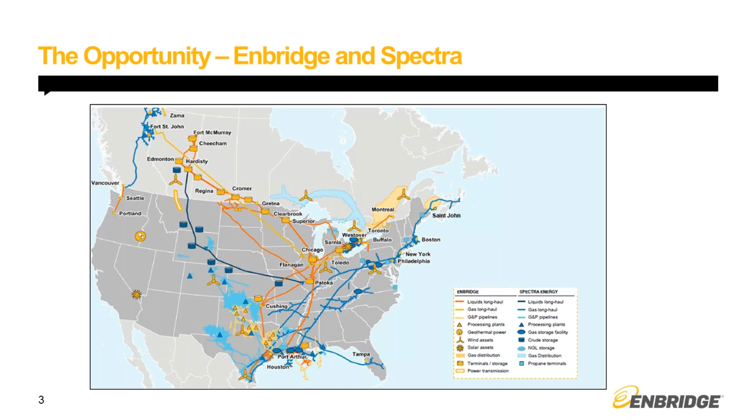So I'm going to talk now about our affordable housing program. We basically have 3 programs for affordable housing providers: residential, multi-residential, and new construction. The first 2, residential and multi-residential, are retrofit programs, so these are for existing buildings, and obviously the new construction is for new buildings. So first I'll cover residential.

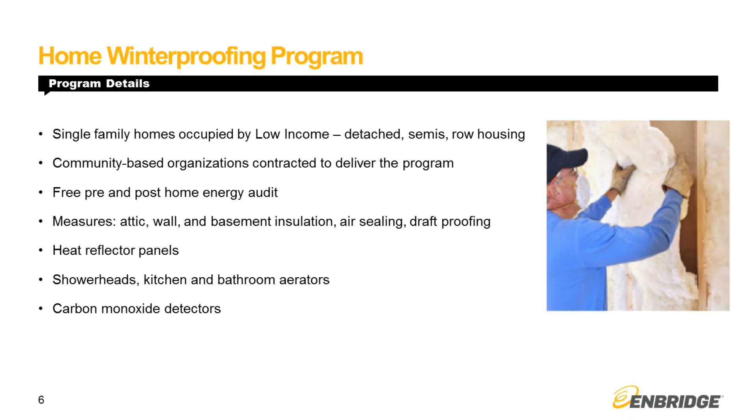Included in the program is a building assessment, which typically would be done by me. I'm not an energy auditor, but I could do a simple gas equipment assessment. We'd also provide an energy audit subsidy if you were to hire a consultant or an engineer to come out and do an ASHRAE level 2 or ASHRAE level 3 audit. We could provide incentive towards that. And then the bulk of the program is financial incentives to help offset the cost of high efficiency retrofits.

So the bulk of what we do is boilers. Like I mentioned at the start, I spend a lot of time in boiler rooms. Typically most of the projects we see are boiler retrofits because that's the bulk of the heating in affordable housing multi-res buildings. But any type of gas savings retrofit could be eligible. And the great thing about our programs is we'll actually develop a custom savings calculation and incentive quote for you prior to you moving ahead with your project. So it's a great way to assess what your simple payback will be and compare it against a different option, maybe a lower efficiency option.

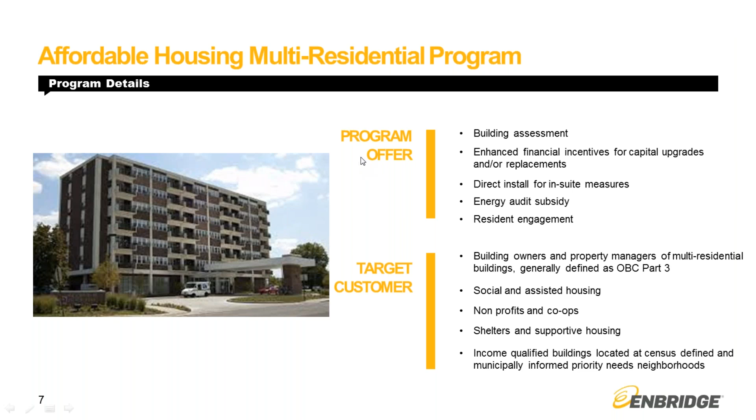And then we can also install heat reflector panels, like I had mentioned on the earlier slide. So heat reflector panels, if your building is heated with hydronic convectors, or water-heated convectors, that's what I mean when I say hydronic, or radiators, so those are your classic steel radiators.

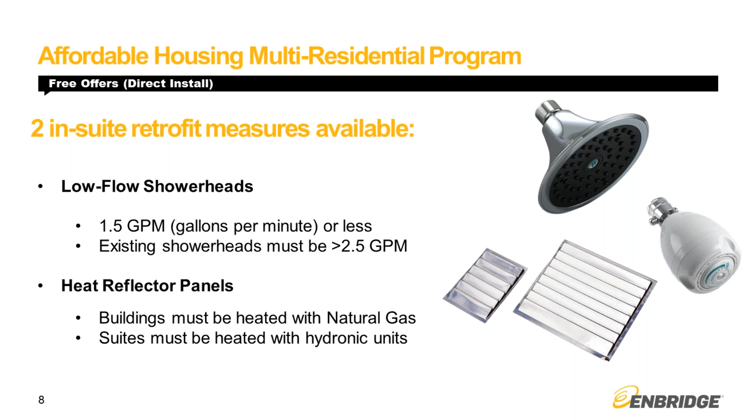These panels can actually fit in behind the radiators and the convectors, and they prevent heat loss through the exterior wall. And by doing that, you can reduce the boiler supply temperature at your boiler and reduce your heating load. So we usually see about 10% savings on the space heating load of a building. And those can be installed at no cost to the housing provider as well. So that sort of covers our retrofit program, so the residential and the multi-residential retrofit.

And then our new construction program was launched last year. Ryan will talk a little bit more about this program, but I'll just give you a quick high-level overview. So basically, the Affordable Housing New Construction Program is designed to help provide incentive to housing projects that are going to be offering affordable housing units to customers, and we can help offset the cost to implement some of these high efficiency measures.

So we do that through 3 phases: a technical assistance incentive and design incentive up front, where we'd actually run a design charrette for you, and also cover some of the costs you would incur to bring some of your engineers and consultants to the table.

We'd also provide an implementation incentive, so once the work's completed, depending on which equipment you've chosen and which efficiency level you're going to be achieving in your building, we can provide up to $1,000 per unit incentive based on your ability to exceed Ontario Building Code. Single-family homes are eligible, and multi-residential projects are eligible as well. The incentive structure is a little bit different, but generally it's the same thing, divided up into 3 stages of incentives.

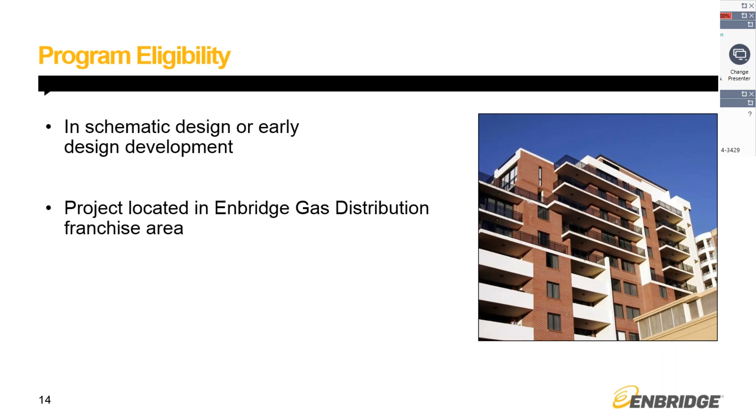In addition to those requirements, the project must also be 3 or more stories and greater than 600 square meters. All of the case studies that we will talk through here shortly were all new construction projects. In addition to that, the projects must also meet the eligibility criteria for public funding assistance for the purpose of creating new affordable housing. In addition to those items, the whole essence of the project revolves around getting in early in the project design. So in order to be eligible, the project must also have been in the schematic design or early design development, as many of the strategies and items that are discussed through the program contribute to decision making. We want to get involved early before those major decisions are made, as a lot of times those early design decisions really impact the overall energy usage and energy savings potential of a project. And finally, the projects must be located in an Enbridge Gas Distribution franchise area.

So the program did provide a number of services. As Cam mentioned, all of these services were complimentary, so at no cost to a building owner or a design team. The first of which was a customized energy model that simulated how the building would use and consume energy. From there, that model was used to identify and evaluate what strategies had the greatest energy savings potential. From there, we use those strategies to also evaluate energy cost savings as well as paybacks. For all of these strategies, since they are improvements or incremental benefit to a project, there are also associated incremental costs to implement them into the project. And to address that, we developed simple payback criteria to help teams identify what strategies might have the best potential and quickest paybacks.

In addition to that, financial incentives were also available to help offset the cost for implementing those energy conservation measures. As Cam noted, there was that implementation incentive to help address and alleviate those initial or additional upfront costs to the design team for plugging those measures into a project. In addition to that, there were also meetings and information transfer that the design team and owner had to provide and sit in on. And so, as Cam noted, there was that technical assistance incentive that is available to the teams to help account for that additional time and commitment to providing that information for the program.

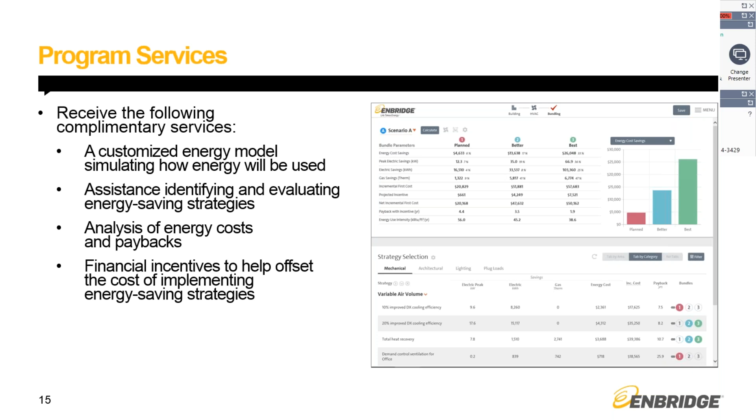I want to take just one step back here and talk a little bit about whole building energy analysis. I won't go into too much detail here, but really this is kind of the building blocks of the program. Whole building energy analysis allows building owners and team members to identify what goals are important to them in helping make decisions. For different teams, their goals could be very different.

One team could be completely interested in energy cost savings. Another team might be concerned with energy usage, and yet another team might be all in determining what they can do to get the maximum incentive through a utility program. So whole building energy analysis at least allows us a starting point for identifying what those goals are.

And then in addition to that, it allows us to determine what energy conservation measures or strategies allow the greatest impact or are critical to meeting those energy goals and staying within a project's budget. Those two things combined allow for reduced time for teams exploring suboptimal strategies or those strategies or options that really don't meet the design criteria or energy goals, or those strategies that really don't get a lot of bang for the buck.

The whole building energy analysis coincides with the energy design assistance process. So this is the process that we followed through the Affordable Housing New Construction Program. The first step was to gather information. That was done via an application for the program where the team completed very basic information on the project. In addition to providing those project details, the team also provided early design drawings and narratives via the mechanical system, lighting system, anything that was available early on in the project.

From there, we took that information and conducted a preliminary analysis where we built up a model, identified various energy conservation measures, and organized them into various bundles, which we'll talk about here in a little bit, and sat down with the team to identify which of those options was best. We then conducted a final analysis where, based on the information and feedback we received in the meeting, we fine-tuned the energy model to provide a truer or more aligned estimate of energy savings potential, and then an estimated incentive based on the design that the team was looking at.

From there, the fourth step in the process was validation or verification. This process was completed after the project was complete and allowed us the opportunity to review final design documents, construction submittals, cut sheets, to verify that the various strategies the team said they were going to implement into a project were in fact present. From there, we created a final model and trued up the savings calculation to provide a final savings value to the team and Enbridge. From there, the various incentives were paid out for each of the projects.

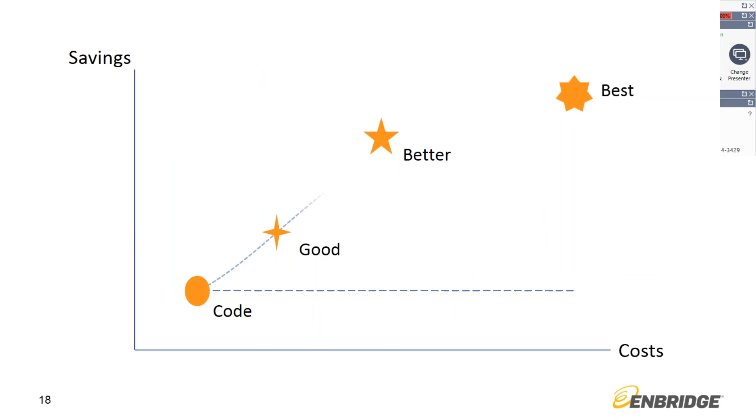I believe that this chart on the screen here really captures the essence of whole building analysis and the design assistance process. On the horizontal axis, you can see costs. Those would be costs associated with implementing more efficient strategies into a project. On the vertical axis, you see savings. Those are going to be energy savings, cost savings.

And through the curve here, you can see that as you move from a baseline or a code-compliant building, there are additional savings. And the steeper the slope, the more increasing value there is for those strategies. However, once you get to a certain range, those savings start to diminish and do not become quite as cost-effective. So through the process, the goal is to determine which of those strategies really provide the biggest savings potential and meet the design team and owner's goals for the project.

To accomplish that task, the program used NEO, or Net Energy Optimizer, which is an online modeling tool and interactive bundling tool that we have developed here at the Weidt Group. This tool allows us to take the very early information that the project team is able to provide us and create a very detailed energy model to capture the savings potential of various strategies.

It also gives us the opportunity to interact with a team and show them real-time what various combinations of strategies will do for them in terms of energy savings potential and impacts in incentives. So as opposed to a team having to choose a strategy, implement it into a project, have that project sit and realize what those savings are, we are able to quickly identify what those estimated savings are in a virtual model real time while sitting down with the owner and the design team.

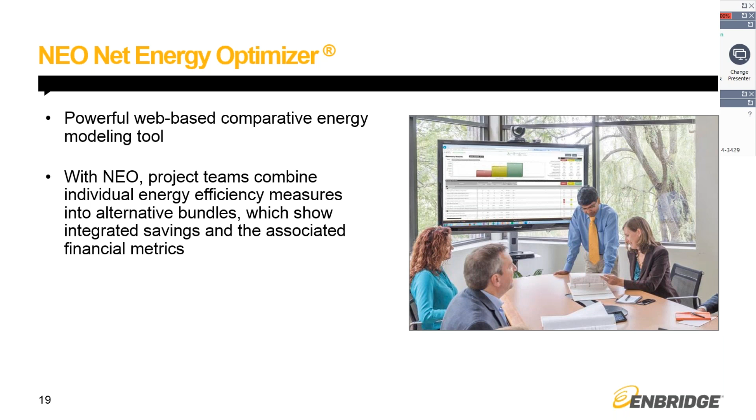So now I'd like to dive into our first real-world example. The very first project that we did was located in southern Ontario in the Niagara region. This project was approximately 12,900 square feet, or about 1,200 square meters. It was a 3-story building.

It was a senior living building, so there were 14 senior living apartments or units throughout the 3 stories, as well as some common area. That common area was the simple corridors or the lobby and communal space on the first floor, in addition to an office. So a very typical senior living building. The original mechanical design was to look at a gas-fired heating unit system for the apartments.

For this project, the design team and owner were concerned about the project budget. And so that was the main goal that we had identified early on in discussions with the team, and we worked to try and address that through our consulting and the program services.

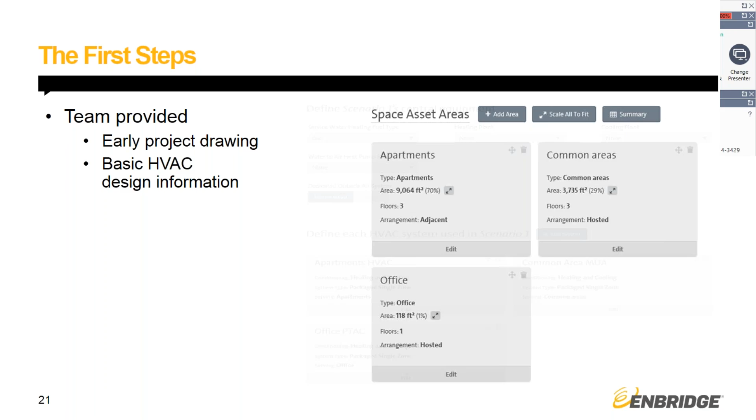To start out, we gathered their application, their drawings, and their narrative, and we took that information and plugged it into the NEO tool. We built up the model based on the space types that were in the building and identified the critical items to develop our model. From there, we took the mechanical system and built in the same information, but this time on the mechanical side. For the NEO tool, the critical inputs are building up the geometry and the mechanical system.

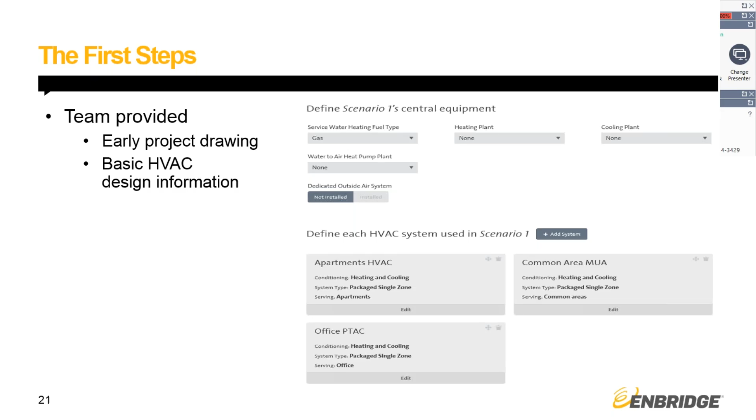Major items that aren't known at the time in early design are assumed values. Those values are based on industry standards and typical values that one might see in these affordable housing new construction programs. So to make this tool work and function, we don't need to have every single input early on, because early on in the design process, those items are not known. But from there, we are able to determine a starting point for savings.

In addition to showing some savings potential, we were also providing information to the team of where their building was likely going to be using energy on both an EUI, or a kBtu per square foot, or a cost side at dollars per square foot. From this information, we were able to say that for this building, the heating load throughout the building was the highest energy user of the various end uses that we had modeled.

But when it came to the cost side, that heating component did go down. And that was just due to the difference in cost per BTU of heating energy versus electric energy, and the difference in gas and electric costs. But again, this is what we use to help influence the team in assessing where they could potentially save money and energy through energy conservation, energy saving strategies.

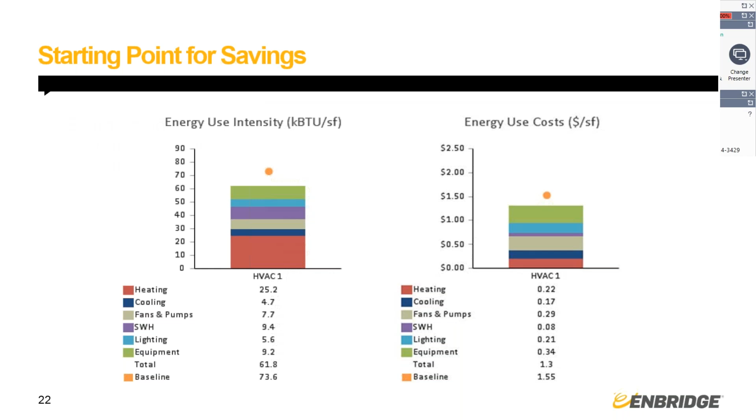From there, we addressed various strategies. So we had a list of hundreds of strategies that we were able to fine-tune and select that were appropriate for this building. Our strategies cover everything from architectural items, wall, roof assemblies, to windows and glazing, mechanical items for the heating and cooling equipment, and lighting, as well as various plug load and service water heating needs. We fine-tune that list to the specific project because every project might be a little bit different, and we have the ability to analyze the strategies for their specific project.

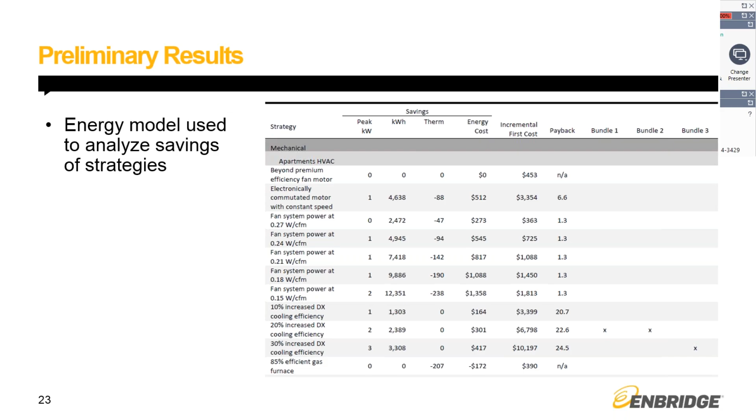From there, we take their project's information and assemble some preliminary bundles. A bundle is essentially a virtual building, or a combination of strategies in a virtual sense. So we can outline for them the energy cost savings of their project at the end of the day compared to that code compliant building. This is, again, a starting point.

As we conducted this exercise prior to meeting with the team, we had assembled the bundles in a good, better, best configuration. So again, if you were to remember that curve that we looked at, as you start to get higher, those potential paybacks do go up, because as you get more savings potential and more strategies, likely those items are going to cost more and you won't get as much of a return out of them. So we brought this information and presented it to the team.

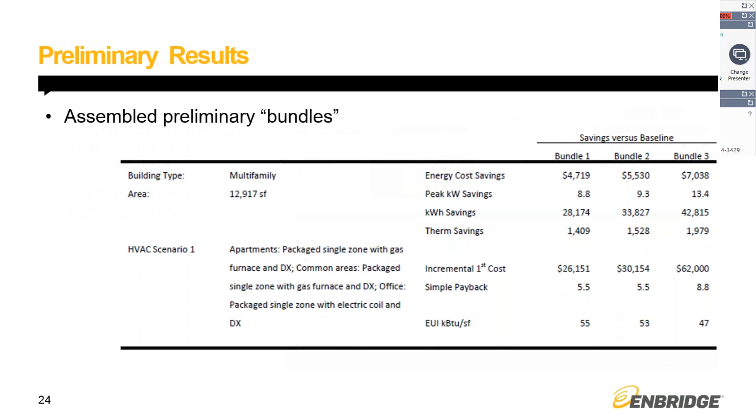From there, we were able to have our interactive exercise with the team. We brought forward the mechanical, architectural, lighting, and plug load measures and discussed those three bundles that we had identified. From there, we were able to look to the owner and the team for input.

One of the key important factors through this interactive exercise is getting that input from the owner and the design team, as that input allows us and them to realize which of these strategies help meet the goals of their project. And it also allows them to take ownership of the model, the process, and the tool.

It's one thing to just present energy saving strategies, but in these meetings and charrettes, as Cam had noted, we can identify and in real time determine which of these might have great impacts or little impacts. That can all be done based on the input and all the thought leaders in the room at one time, which is very helpful to the process. And this is what allows us to eliminate those scenarios that might not have great savings potential or meet their goals.

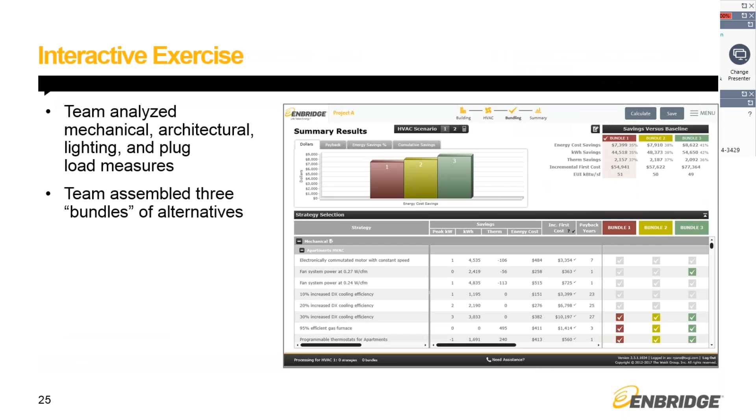As we move forward, our discussions turn to architectural measures. And again, based on those decisions that had been made early on, when it came to the wall system, there really wasn't much opportunity for savings here. But we were able to capture the level of efficiency that they were going with.

When it came to the roof assembly, this team did have some potential. So as you can see from the three bundles here, in bundle 3, we were able to shift that R-value out to show them if you did go with an R-value of R60 compared to the R50, this would be your additional savings potential. And from there, we were able to capture what the impacts would be in incentive as well.

On the architectural side, we were also able to address the glazing strategies that that team was looking for. They were able to provide us with the several different options they were looking at so that we could update and customize Bundle 3 to show them the impacts there as well.

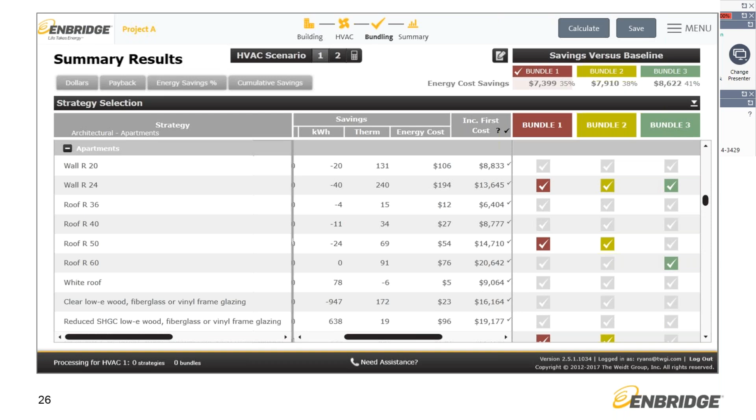We also addressed lighting through this project, and this is one of those items that in a design process, the lighting is likely not known definitively at the time of these discussions. As I noted earlier, we want to try and get involved in a project early in schematic design or design development. And at that time, lighting layouts, fixture selections, they're really not known. So what we try and do through this process is to just capture the installed energy or input wattage of a project.

And as you can see here, we organize our strategies in a stair-step pattern, as through discussions with the team, they had not yet made those selections. So we wanted to try and show them how if they went with the more efficient scenarios or installed fewer lights to still meet their design requirements or foot candle levels, they could potentially save energy. And what we're showing on the screen here is the apartment lighting. And so we had built that up to show them their various options there.

In addition to the apartment, we also presented to them how the various measures in the common areas as well as their little office would factor into those calculations as well. In addition to lighting design, lighting controls were also addressed. This was a smaller project, so the lighting controls and daylighting controls had smaller impacts, but as we learned in some of our later projects, there was more savings potential tied to those various measures once the projects became larger and some of these supporting spaces outside of the apartments increased in size.

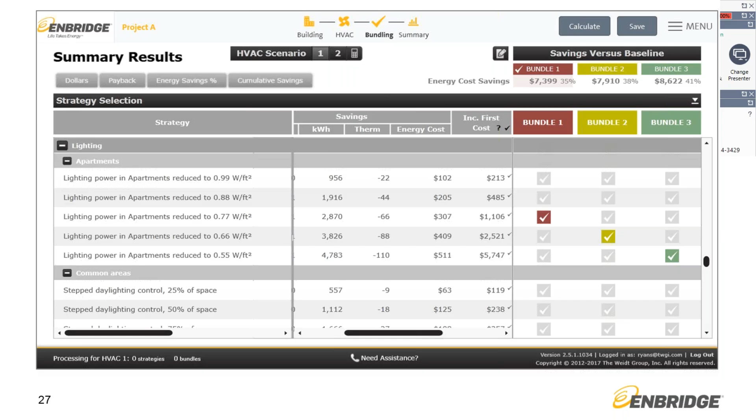From there, the final section that we had addressed with the team was various plug load strategies and service water heating strategies. For plug load items, we really looked at did a project have refrigerators, clothes washers, or some projects might have dishwashers. By going with more efficient equipment there are significant savings tied to those items.

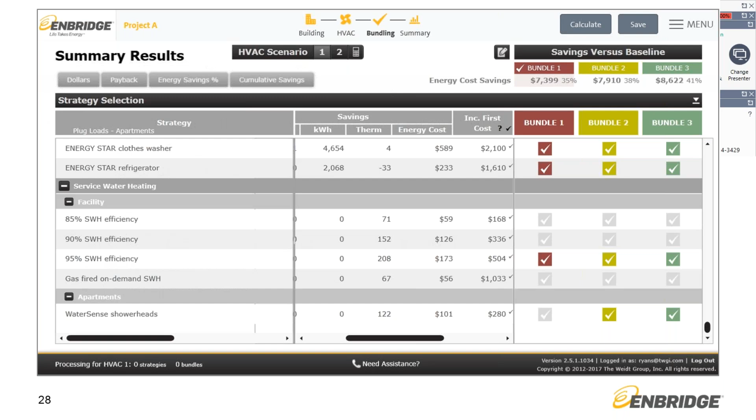In addition to that, there are service water heating strategies that could be applied. And as you can see from this chart, the team here was pretty committed to going with high efficiency condensing service water heaters. So we had applied those across the board. When it came to low flow or WaterSense shower heads, the team was uncertain if they would implement those. So those were located in our bundles 2 and 3 just to see what the overall impact was for those strategies. At the end of the day, this is kind of what accounts for that preliminary analysis that we talked through in our design assistance process steps.

After this meeting, the design team noted that there may be a potential design change for their project. As we noted earlier, their initial design was gas-fired heating units for the apartments. But we also noted that the project budget was also of importance. And as the team began to evaluate costs that came in for the project, they determined they may need to switch mechanical systems to go to a lower upfront cost system. That system was our scenario 2, or our electric heating units.

So this was a perfect scenario or a perfect case study to come up for the program, as with Neil and with the program, we were easily able to identify this and model this for the team and show them what impacts their original design or their gas-fired heating system would have compared to that of the lower upfront cost electric system.

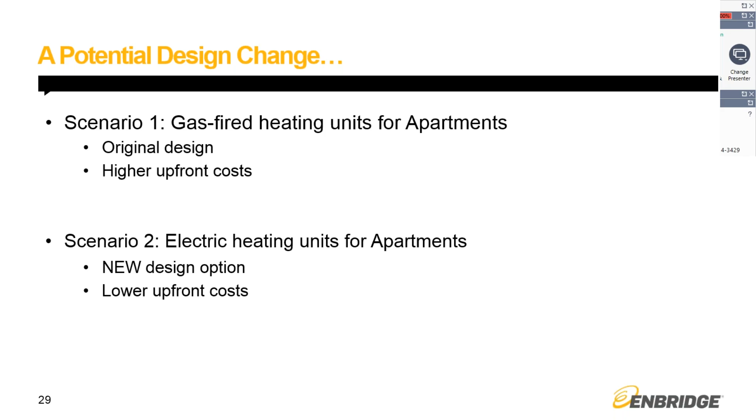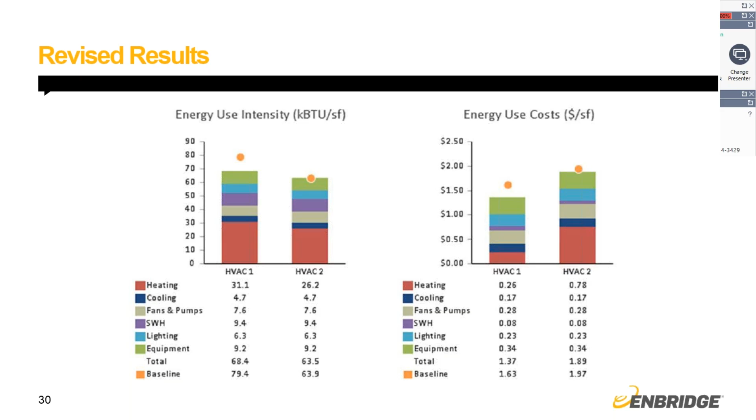From there, again, we had 3 bundles in each scenario. Other than the mechanical system change from the gas-fired unit in the apartment to the electric heating option for the apartment, all the other strategy selections were in fact the same. All of the architectural items, lighting measures, plug loads, service water heating were consistent between the 2 scenarios and the respective bundles. In the chart here, the respective bundles that had the same architectural, plug load, lighting, and service water heating strategies would be referenced by Bundle 1 and Bundle 4 in the red and the blue.

Referencing those 2 bundles, you can see that the gas heating scenario had an increase in savings potential in terms of energy costs. That was because the electric option, or Bundle 4 in blue, was the highest energy cost of all the bundles modeled, and Bundle 1 had a relative savings of over $5,000 compared to its electric counterpart. That same trend was seen throughout the other bundles as well, so referencing Bundle 2 and 5 and 3 and 6. So based on this, we were able to determine that the gas heating option had an increased savings potential on an annual basis for energy costs.

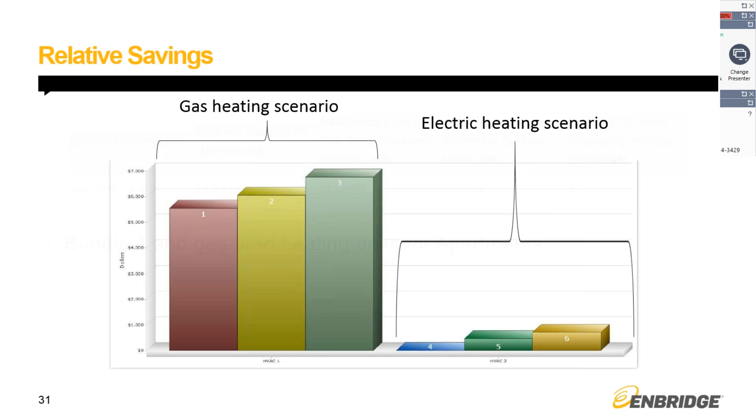When we paired that with an additional breakdown and analysis of the additional costs to go with that gas-fired unit, the team was able to determine that that additional cost for this project was just under $12,000. But in addition to that, the increase in savings potential going with the gas-fired option led to an additional incentive of $2,100. When doing a simple payback analysis of that additional cost, the incentive, and then the additional relative savings of the gas unit compared to that of the electric unit, the payback in years was just under 2 years. And for the team, that was a very good payback.

And so the team ended up going back to their original design and going with the gas-fired units for the apartments. And they ended up selecting Bundle 1 at the end of the day. That Bundle 1 contributed to an estimated savings in terms of energy of 36%. That put their estimated incentive at that max incentive tier of $1,000 per unit that Cam mentioned, and since it was 14 units, it was a $14,000 estimated incentive. And you can see from that, that estimated incentive easily covered the additional cost of the gas-fired unit over the electric unit and led to good savings potential.

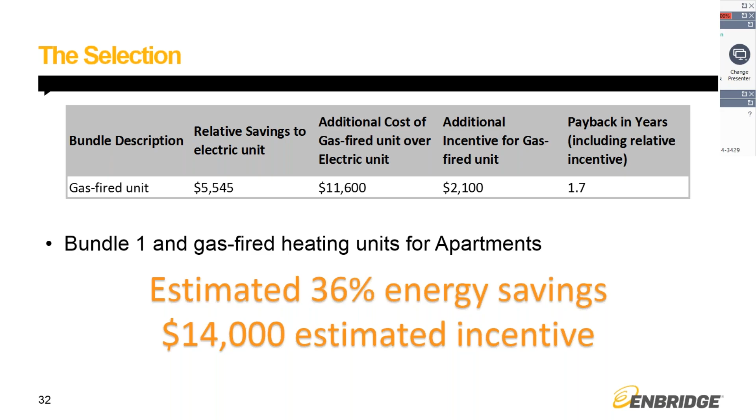And then the reduced plug loads. That was modeled as Energy Star equipment and factored to about 11%. All of the other items contributed to about 17% of the cost savings and were strategies that helped reduce service water heating, cooling, heating set points, and then improvements to the envelope.

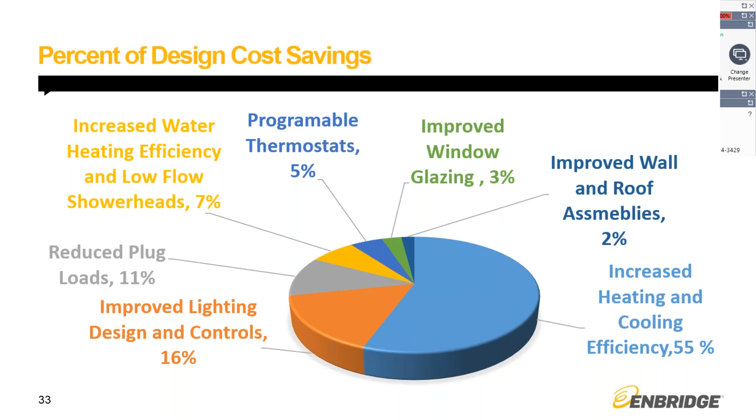But as we noted earlier too, the final step in the process was our verification or validation phase. Once this project was complete, we were able to review their final construction documents, construction submittals, and project cut sheets. When we reviewed that information, we determined that they had implemented 96% of the original modeled savings. And so from there, we were able to update our model and determine what their new savings and incentive would in fact be.

When we adjusted the model based on what we found in the project, we determined that now the savings potential was approximately 35% energy savings over the Ontario Building Code. So it went down just slightly, but we were able to, with that, calculate that incentive. And the 35% savings threshold was still in that max incentive tier, so the project still realized the $14,000 incentive.

A few key items to point out here were that the 96% of the original modeled savings was due to some strategies coming in at higher efficiency levels and some that were not implemented into the project. And so that trade-off of more efficient here, less efficient there, is captured in the verification or validation phase. And for this project, they did not implement Energy Star equipment, but we did realize that they had much higher energy savings on the lighting side.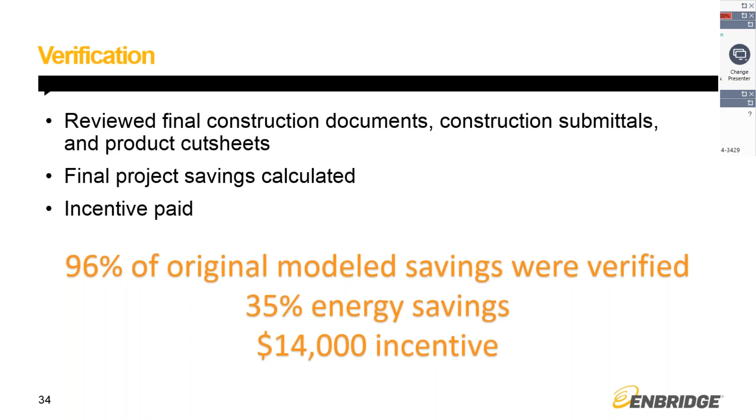This team had identified measures that were contributing to savings and was really driven on significant envelope improvements. So that was one of the main areas of focus with this project, identifying and modeling what their R values and wall, roof assemblies, and glazing assemblies were to meet their goals for this project.

This team also had multiple scenarios that they wanted to look at. This team wanted to identify again how potentially different reheat options throughout their building would contribute to energy use, consumption, and savings. And so there again, we were able to model for them an electric reheat option as well as a hot water reheat option, which would have added boilers into the project.

As we move forward here, the next project was yet even larger at 158 units, 12 stories, and just over 19,000 square meters. This project was in the Toronto area and did not have a large retail or commercial space, but did have a significant parking garage underneath the project. This one was also a little different in the fact that it had a district mechanical system. That district mechanical system was modeled and addressed to account for the high efficiency levels associated with that district system.

The other area that was of key focus here was due to that parking garage, we were able to identify various control strategies to address the ventilation loads and requirements for those spaces. At the end of the day, this project is estimated to be at 20% savings potential, and again, has not yet been completed, so just in the design phase at this time.

The next project was a similar size to the one we just talked about. It had 162 units and was a 7-story building at just under 19,000 square meters. This was in the region of York. Again, like the previous building, it had a large parking garage, but did not have a district system. This project had a high-efficiency hot water and chilled water system serving the heating and cooling loads in the building. This team also strived to make major improvements to their lighting design and lighting control systems.

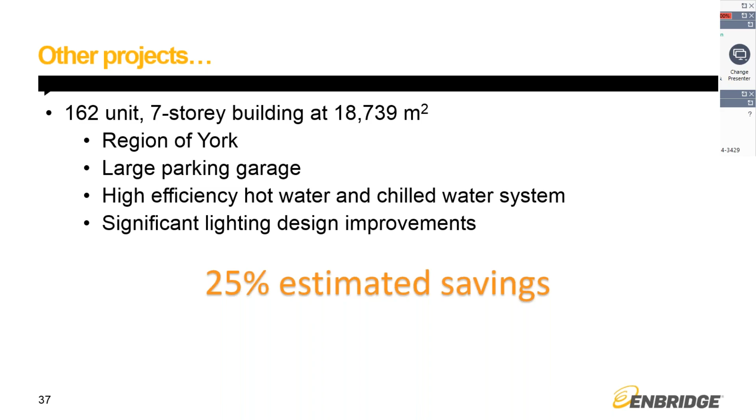The final project that we had looked at was, again, a little smaller than the previous ones, but was a 67-unit project of 4 stories and just under 14,000 square meters. This project was also in the Toronto area, and like the previous one, had a high-efficiency hot water and chilled water system. Also, like the previous project, these folks and team and owner were also very interested in lighting design and the improvements and what those strategies could offer them in terms of energy savings.

Throughout this project and during and after our meeting, we were able to identify a few items that needed to be updated. And again, as I mentioned, with this program, those changes can easily be made and new incentives and savings estimates can be provided in a very short time frame. For this project, the area or building scope and size changed slightly from the original documents that were provided.

So once we got those estimates updated, again, we updated the model and were able to provide this owner and team with updates in strategies, savings, and incentives just following that meeting in a very quick time frame. And again, they were able to use that information to help influence some of their design and lead them to about 32% estimated savings, and again, that max incentive rate for their project.